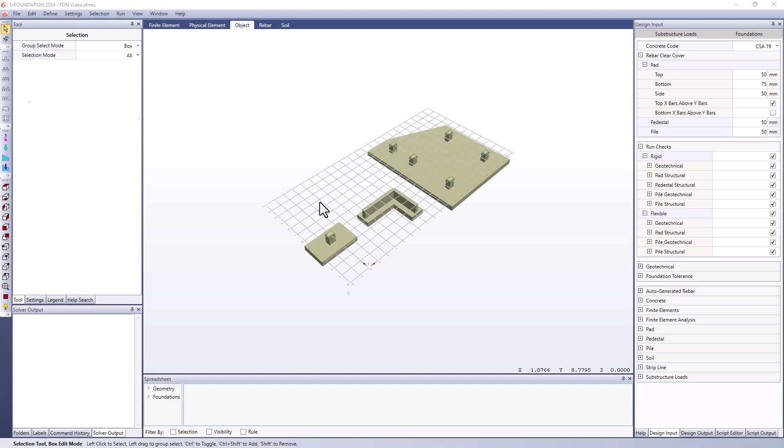You will notice that when we define a foundation, even if we haven't specified any reinforcement, it's going to have within the rebar tab the display of the reinforcement already done for us. So in this example here, I've got a spread footing, I've got a kind of L-shaped wall foundation, and I've got a mat foundation as well.

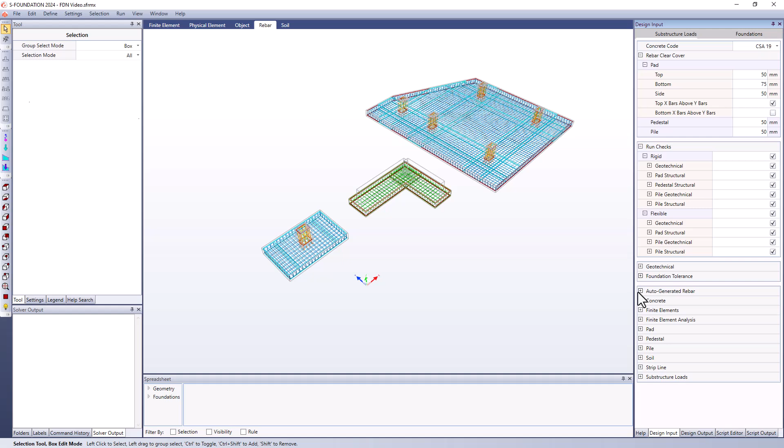And these all have reinforcement despite me not having defined it yet, and that's due to the fact that it will auto-generate rebar for us based off of the settings within this field in the design input window under auto-generated rebar container. So that's where that information is coming from. But let's just start off by looking at some of the different definitions of rebar that we have available to us. And I'm going to use the spread footing example, or isolated footing, as my starting point.

So I can dive into this a little bit more by right-clicking on it and going to Define Pad Pile Cap. Another option as well, which gets us to the same spot, is to go to Define Menu, and I can go to Pads Pile Cap as well. And in this example, I said I was going to start with the spread footing, which is the first of the three pads that I see here. And this can be applied to different types of foundations.

And I want to look at the different parameters that I can define for this type of reinforcement. You'll see right away that I have a rendering from a plan view of the reinforcement that we have. And this is also showing me some of the dimensions and different properties related to the definition of this pad. And below that, we have information related to the rebar. So I can see here the first tab is showing me rebar.

It's kind of a high-level definition of our reinforcement, where we have it separated into different columns. We have the top and bottom layers, how many top and bottom layers I have. I have a tab for patches, which we'll get into more later on. I also have a tab for strips, which we'll talk about shortly. And then a uniform demand force.

So this actually goes a little bit into what I'm going to be talking about next with the different types of reinforcement. But the default type of reinforcement for a spread footing is a uniform reinforcement, meaning that we have essentially the same type of rebar and spacing in each direction throughout the entire size of the pad. So we can actually vary it between X and Y directions and top and bottom layers, but it's meant to be consistent throughout the entire dimension.

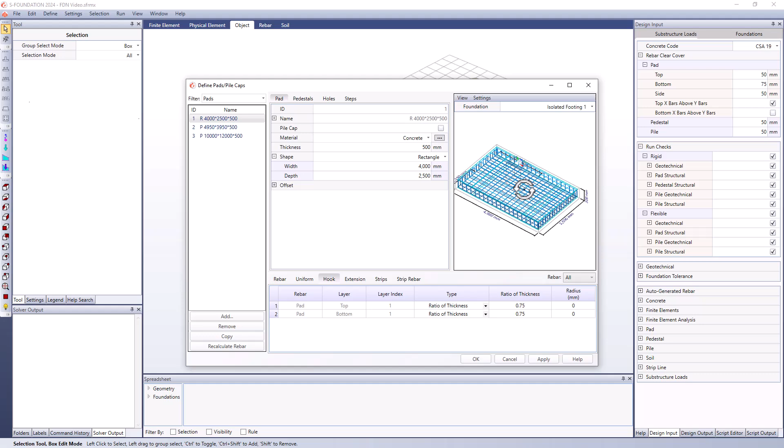The next tab over, we have the hook tab, which is going to allow us to control the hooks on our rebar. So here, if I just zoom in a little bit more, we can see that we do have hooks and we can control the radius of the hook and also specify it to be based off of the dimensions of the rebar or the pad itself, or just a user-defined length.

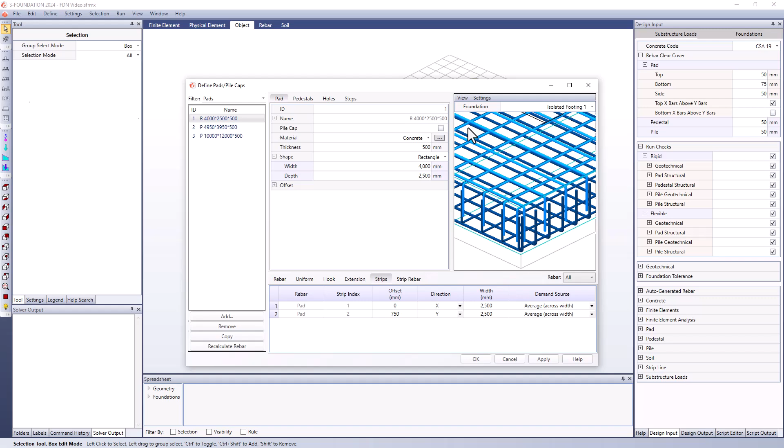Next to that, we have the extension tab, where we can control the extension relative to the bar diameter or the thickness of the pad again, or our own custom length. And then finally, next to that, we have the strips. So I'm going to switch back to my original top view here. And we can see here that we've got, well, maybe it's not so easy to tell.

I'm going to turn off some of the information here. Let me just look at what I can turn off. So I'm going to turn off my uniform rebar. And I'm left with basically these blue squares or rectangles. And these represent the strips in my foundation that are automatically created, and they're centered on the pedestal that I've defined. So I have two strips, strip index 1 and 2.

You'll notice that one of them is in the X direction, and it starts at 0 and it extends the whole width of the pad. And the other one is in the Y direction, and it is not extending the whole width of the pad, but it's extending basically a width of 2,500 millimeters to sample the response and the results of our foundation along that pedestal zone or that column zone.

And once again, I have control over the demand source that I saw there. So here we can specify or change the width. We can add additional strips if we wanted to. So I could go back to the high level rebar tab and I can say I want 3 strips rather than 2, for example. I just type in the number I want.

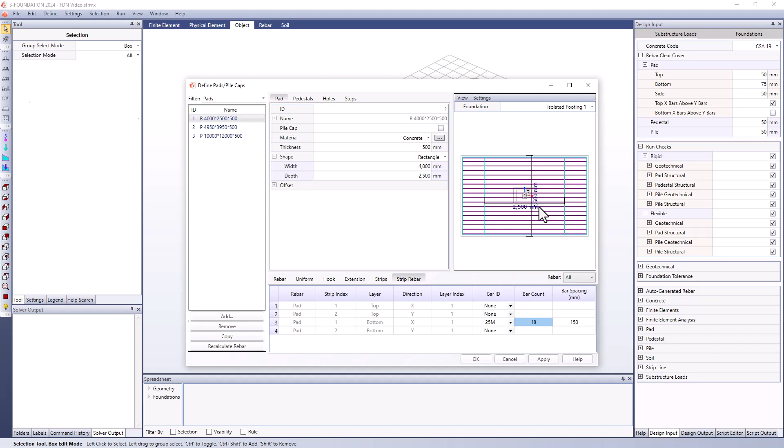And then once we're satisfied with our strips, if we did want to add additional bars in a certain direction, I could add those just in that specific strip area. So I could say here I've got a strip rebar that maybe has a definition that is a different bar size, for example, than what I have elsewhere. So in the x-axis, for example, I'll go with a strip spacing of 150 millimeters, and it's going to add those extra bars in there, and they're going to be working alongside the uniform bars that I have in my model.

Going back to the rebar tab here, you'll notice that not only do we have strips and the uniform bars that we talked about, but we also have the option to add patches, which I'll talk about more later on. So let me just cancel out of here and look closer now at our wall foundation.

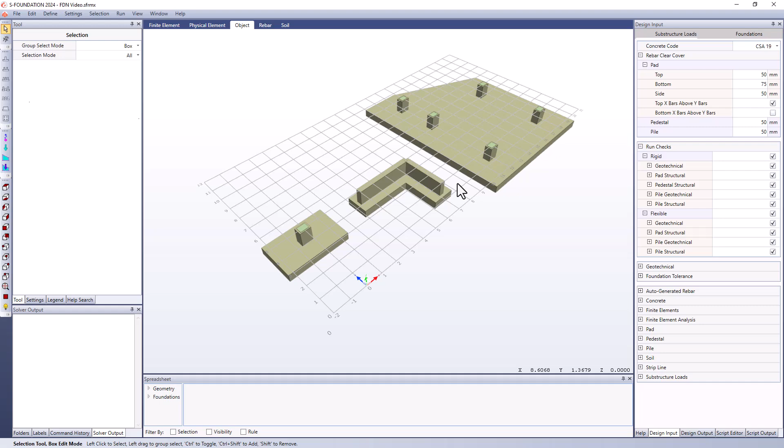And the wall foundation is defined a little bit differently than the spread footing. We basically have these different segments of our wall that are collinear, and then we might have a different direction for the next segment. So to do this, we're not using uniform rebar. Now we're using patch rebar, which is a little bit different than strip rebar.

And so if I just look at this data a little bit closer, I can right click and go to Define Pad Pile Cap. I select my foundation that I'm interested in. And you'll notice right away that it's showing me the patches. So if I go back to the rebar tab first, I can see that I don't actually have the ability to define or change the number of patches that I have, but I do have the ability to configure the patches a little bit differently.

You'll also notice I don't have uniform rebar, which would be shown in blue on my screen. It's just the patch rebar that I have at the moment. So here I can go in and I can change the hook and extensions like I talked about earlier. But if I wanted to look at the patches, you can see that this information is actually all grayed out. So I don't actually have control over this, but I can configure the patch rebar.

So within this patch, I'm basically controlling the reinforcement within this one rectangle effectively, and doing the same thing for patch number 2, just in this Y direction oriented rectangle. So I can modify what the bar size is within any patch. I can change the bar counts there and make it whatever I wanted it to be, and it will be reflected in my capacity calculations.

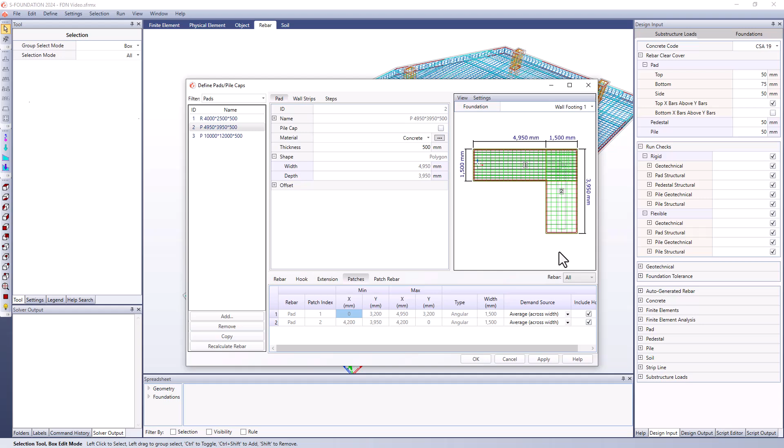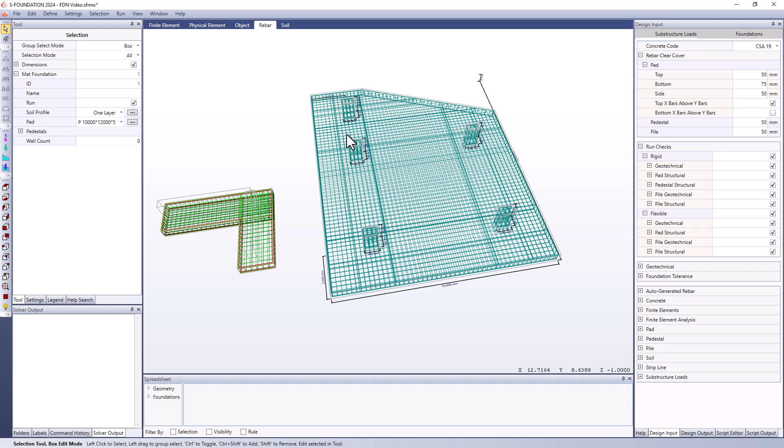So the last foundation that we haven't really looked at closely is the mat foundation panel. And you can see here that I've got a mostly rectangular mat foundation with a little bit of an angled edge to it on the one side. And I've got 5 different pedestals. So right away we can kind of make out the strips that are created along the pedestal locations. I'm not going to necessarily modify the existing strips, but I do want to explore them a little bit more.

So if I go to the rebar tab at the top, we can see that we have top and bottom layers of uniform rebar, which again I can control here. I can modify the bar sizes that I have available to me, the bar counts, and so on. We also have, as we see, 5 different strips. So I have one in this direction here, a second one in the Y direction, and then I have 3 in the X direction. And I don't currently have any patches.

But let's look at our strips a little bit closer. You can see that we do actually have the ability to modify these locations and the directions and the widths and the demand sources, and of course the reinforcement that's being used in these. Right now I don't have any extra reinforcement, but if I wanted to, I could go ahead and define that. So let me just choose one strip as an example.

Let me just go with the bottom rebar here on one of these strips, and I'm going to say here that I have 30 M bars, and I'm just going to go with a strip spacing of 120 millimeters. And you can see that it's added that to that foundation. And I can do the same thing maybe for one more, just to see if we can get a little bit of an interesting display going on. And again, I'm going to say the same bar count that I had before. You'll notice here that this one has an angled edge at the end, which is accounted for there.

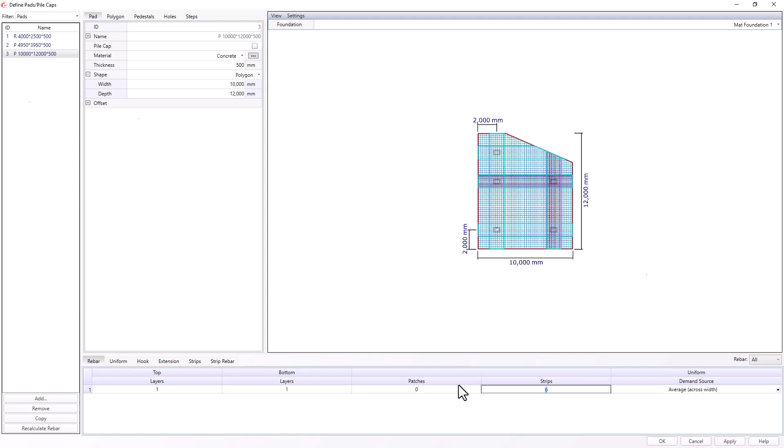If we wanted to add additional strips to our foundation, we can do that as well. So I can click on the rebar tab again, and right now it's showing me 5 strips, but I want to add one more, so I'm going to click on 6 strips, let that take effect, and then go back to the strips tab. And you'll see here, maybe I just expand this because I do have quite a few strips. You can see here that I have the offset that I can define, the direction, and the width.

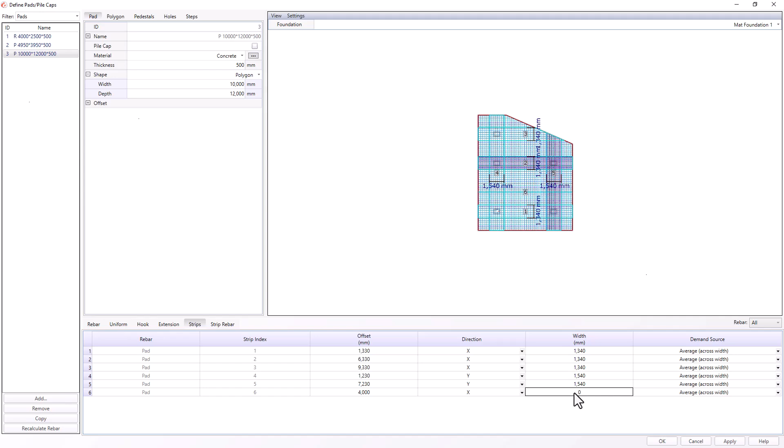So let me just go with the offset of, I'll say I'm going to use a value of 4,000 millimeters. The direction is in the X direction. And then I'm going to specify a width of 2,000 millimeters. So you can see it's kind of landing between my 2 pedestals right here.

Now I can specify the rebar in that area. As you've probably observed by now, I'm looking for strip index number 6, specify the type of rebar that I want and the bar count. And again, I'm just going to go with the 13 bars just to allow that to show up there. So if we wanted additional capacity for flexure, for example, in that location, that would be one easy way to do it. It extends the entire length of the strip or the pad in that direction.

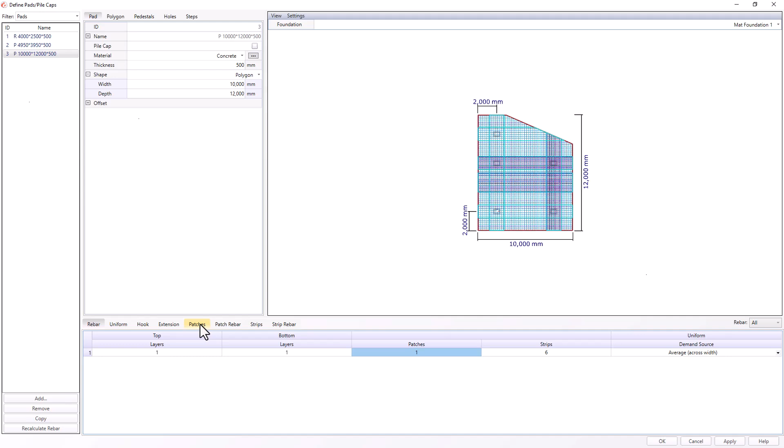The last option that I want to just indicate here is the definition of custom patches. So I can go ahead and define that as well. I specify how many patches I want. I'm just going to say I want 1. And with the patches defined now, this is no longer 0. I have this tab that allows me to define the patch. So here I can specify my starting point of the patch. I'm going to say it's at 2,000 millimeters in the X. This is the minimum location, and 2,000 in the Y.

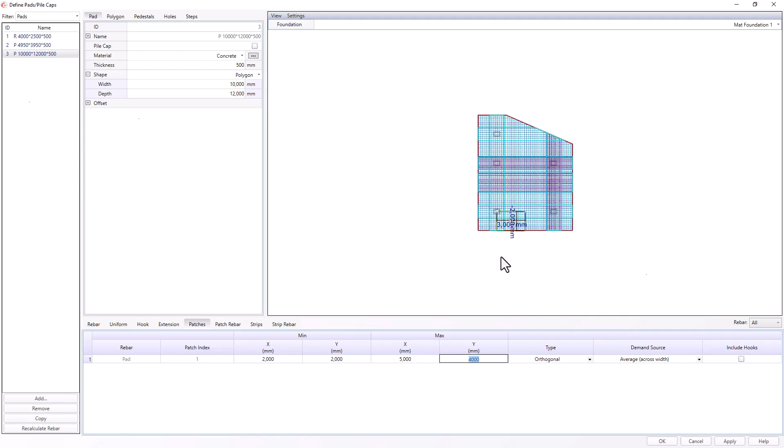And then for the X location and the maximum, I'm going to set this to be 5,000 millimeters, and in the Y direction it's going to be 4,000. So now we can see this patch has been defined. It's actually kind of just ending at the top of the pedestal there. And we have the ability to control whether this is an orthogonal patch or an angular patch. If it was angular, we can specify, again, the width that's going to be defined as well. I'm just going to go with the orthogonal option.

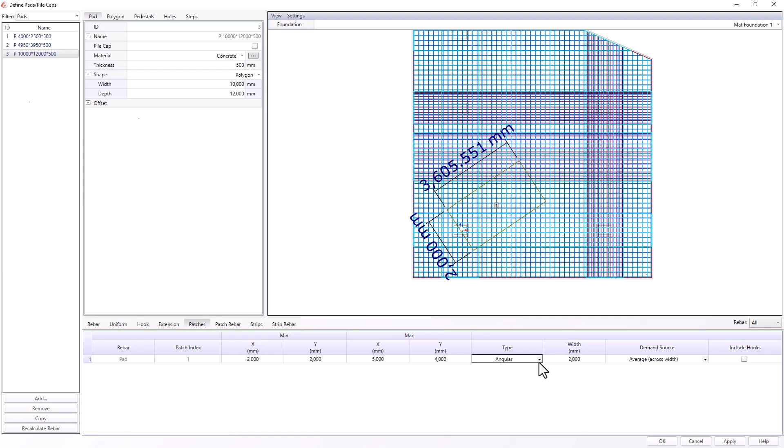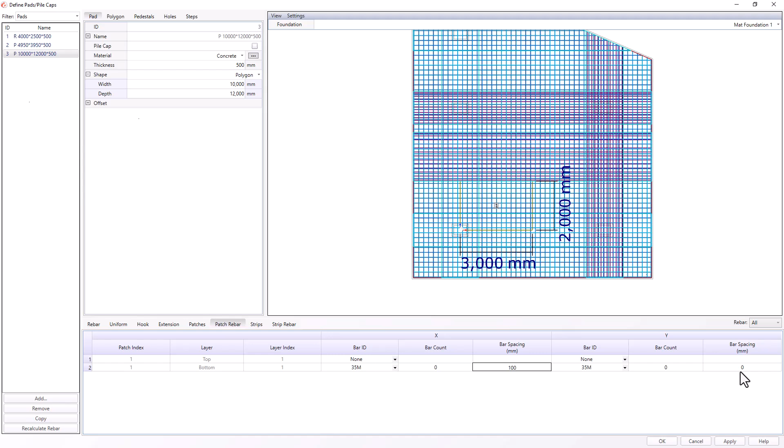And now I just want to jump into the patch rebar. And the reason for this is that I can define, again, within a more concentrated area, the reinforcement that's being used. So let's say I'm going to use a slightly larger bar in the X. I'll do the same thing in the Y-axis. 35 M bars. And I'm going to say that we have 100 millimeter spacing for these. This may not be necessarily realistic, but again, just showing you how this can be set up. And the same thing in the Y-axis, 100 millimeter bar spacing.

And now we have, along the bottom of our pad, some larger bars at quite a tight spacing, contributing to the capacity in that location. Also, since we've defined this patch, it's going to create a strip integration line centered on that patch, extending just the length of that patch, unlike the strip that extends the entire length of the pad. So hopefully this gives you a bit more information about S-FOUNDATION's rebar definitions.